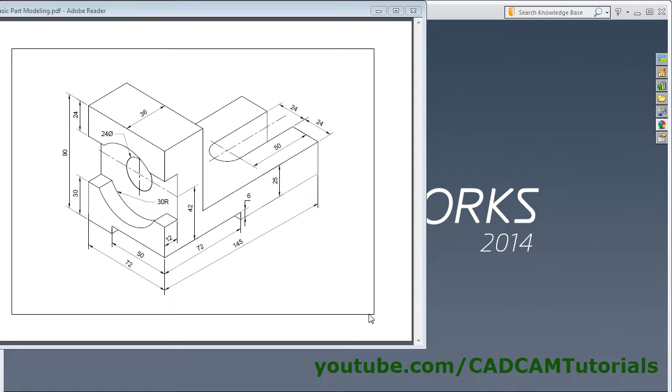In this tutorial, we will create this object. Click on New, select Part, OK.

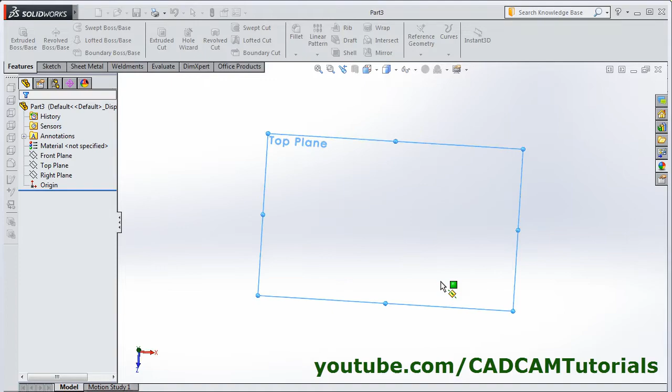Now in this object, at first we will create this horizontal plate of 72 by 145 and 25 thickness. Click on Extrude Boss Base, select Top Plane, and click here and select Center Rectangle.

Give the center point, take your cursor away, and click the second point. Give the Smart Dimension, click on this line, give the position for dimension, give the length of 72, enter. Then select this vertical line, give the position, give the length of 145, enter.

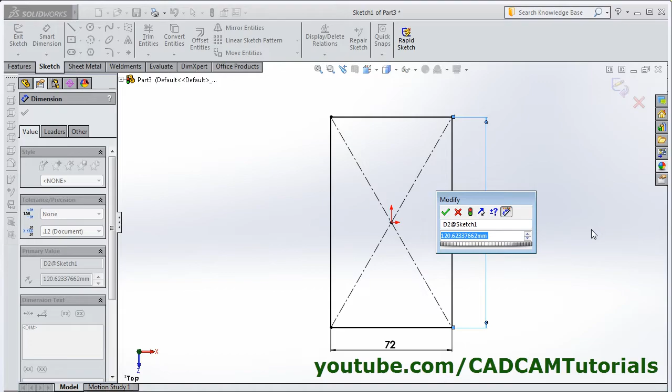Click on OK. Then give the height of 25, enter. Click on OK. Zoom fit.

Then next is to create this vertical plate of 36 thickness, and the height will be, total height is 90 minus this 25, that is 65 will be the height.

Click on Extrude Boss Base, select this surface, then click here and select corner rectangle. Give the first corner point, give the second corner point on this line.

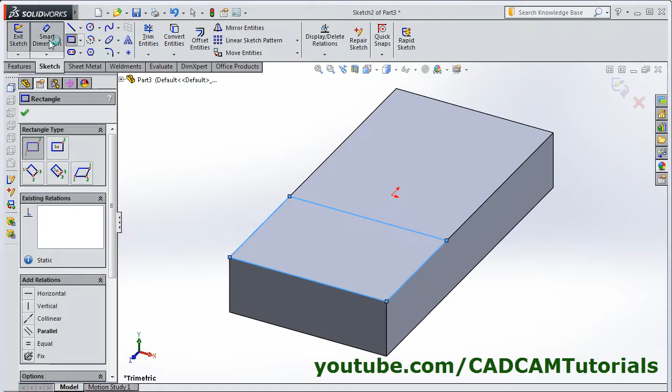Click on Smart Dimension, click on this line, give the position, give the width of 36, enter. Click on OK. Give the height of 65, enter. OK. Zoom fit. The next is to create this cut of 24 width.

Here dimension is 50 and location is also 24. Now this is a cut, therefore click on Extruded Cut, select this horizontal surface, then click here and select Normal to.

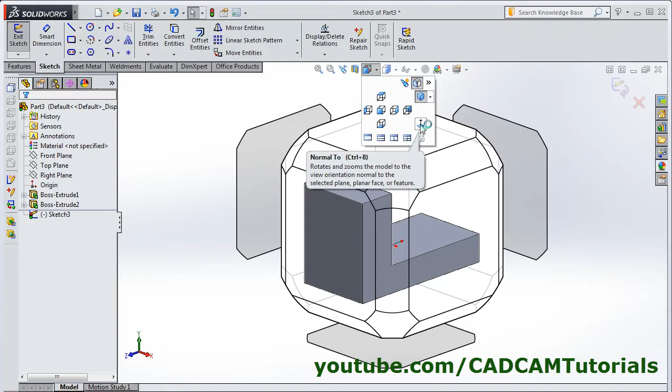Zoom it. Then create one slot, select this straight slot, then drag the center point, give the first point here at the midpoint, give the second point, take your cursor away and click there. Click on Smart Dimension, select this line, give the location, give the length of 50, enter.

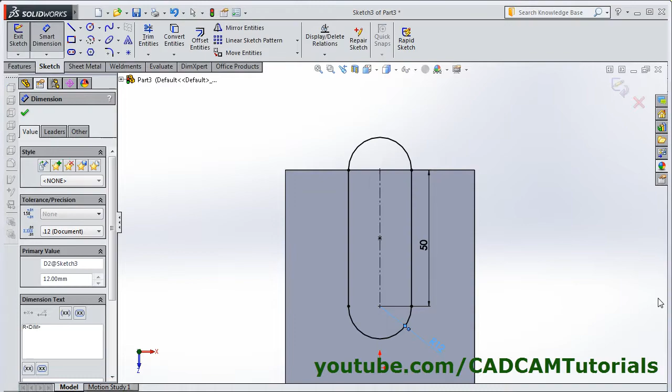Then select this circle, click outside, give the radius of 12. Select this line, click here.

Now we have already constrained this sketch to this origin point, therefore this dimension is not needed, and if you want this you can keep it driven. That means it will remain there for reference only.

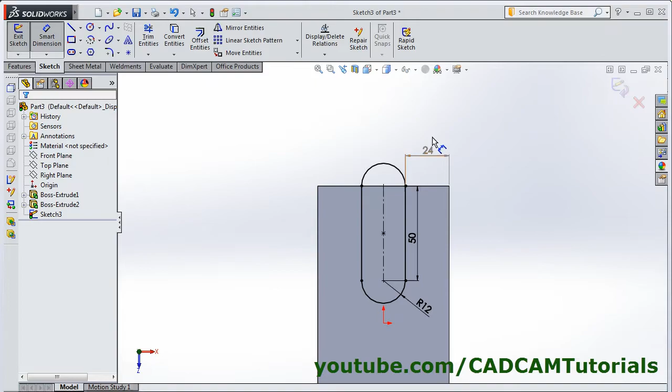Click on OK. So it will show in gray color. That means it is for reference. Click on OK. Orbit it.

And click here and select through all. Click on OK. Click outside. Zoom fit. Click here and select isometric view.

Then next will be this rectangular cut. The location of rectangle is 24 from the top line and 30 from the bottom line.

Click on Extruded Cut. Select this surface. Then select this corner rectangle. Give the first point on this line. Give the second point on this line.

Click on Smart Dimension. Select this line. Take your cursor outside and click there. Give the height of 24. Enter.

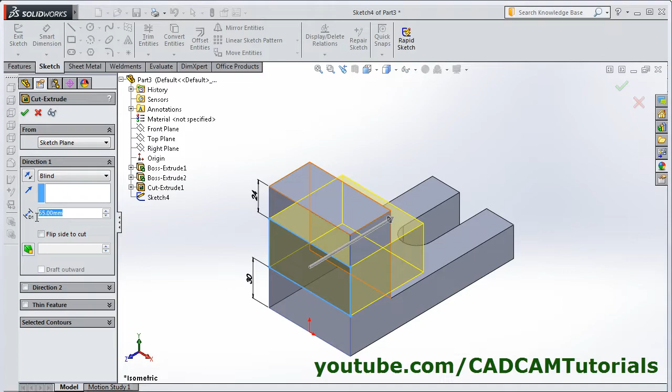Then select this line. Take cursor out. Click there. Give the height of 30. Enter. Click on OK. And depth is 12. Click here and give the depth of 12. Enter. OK.

Then there is this circular cut of 30 radius and 12 depth. And if you want to give the height of this circle from this bottom line, then it will be 42 plus this 6, that is 48.

Click on Extrude Cut, select this surface, then click on Circle, drag the center point, give the center point, then click the point, click on Smart Dimension, select the circle, give the location, give the diameter of 60, enter. Then select this horizontal line, select this point, give the height of 48, enter.

Then select this line, select this point, 36 is correct. Press enter. Then click on OK. Give the depth of 12. 12 is already there. Click on OK.

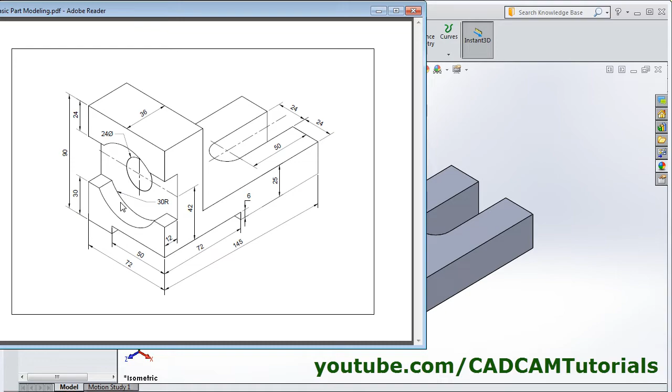Then this hole of 24 diameter at the center of this 30 radius circle. Click on extrude cut. Select this surface. Click on circle. Take your cursor to this circle so that it will show the center point. Click on the center point.

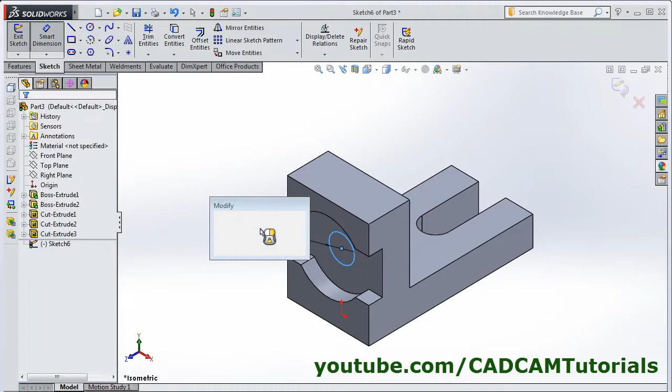Give the second point. Click on smart dimension. Select the circle. Give the diameter of 24. Enter. Click on OK. Click here and select through all. Click on OK.

Then this cut of 72 by 6 and 50 depth. Click on extrude cut. Select this surface.

Select this 2-point rectangle, corner rectangle. Give the first point. Give the second point. Click on smart dimension. Select this line.

Give the length of 72. Enter. Select this line. Give the height of 6. Enter. Click on OK. Give the depth of 50.

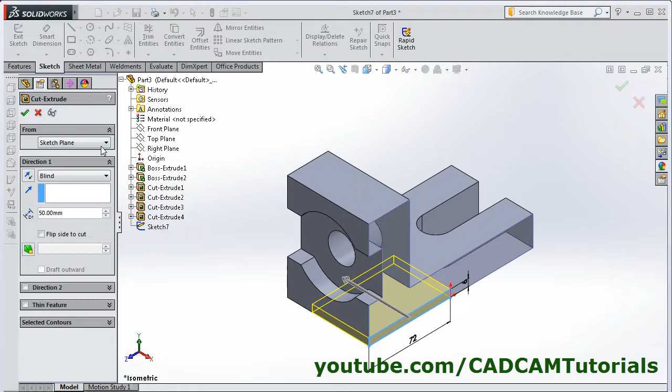Enter. Click on OK. Then to give the color to the object, click here, edit appearance and choose the color. Click on OK.

That's all. This object is ready. Thanks for watching. We will stop here.